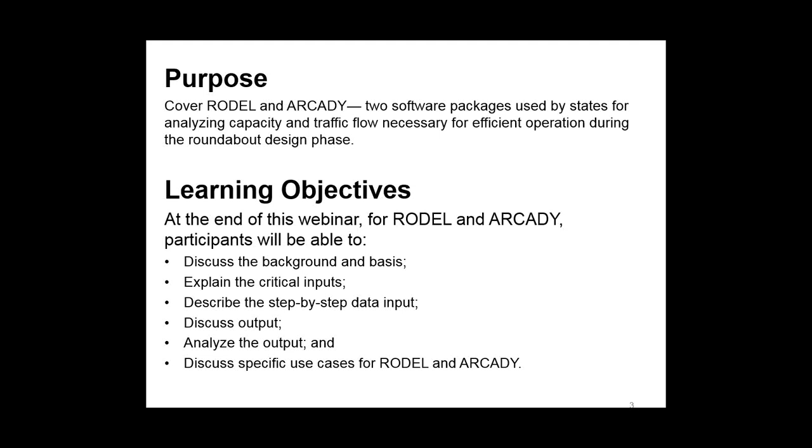TRB will provide 2 professional development hours to professional engineers that attend the entire webinar session. As far as today's learning objectives, at the end of the webinar for the systems Rodel and Arcady, participants will be able to discuss the background and basis of these software, explain the critical inputs, describe the step-by-step data input, discuss output, analyze output, and discuss specific use cases for Rodel and Arcady.

The outline of the presentation: just a quick introduction of some of the key features of Rodel. Then we'll get into the basis of Rodel, which covers in brief the research behind it, providing an understanding of what's under the hood and why that's important to understand. Then we'll talk about the transferability and validation of Rodel.

Are these UK capacity prediction equations transferable to the US and or other countries? We'll have a quick look at some of the comparisons of Rodel's capacity predictions to US field data and work that's been ongoing in that respect.

Then we'll get into the program and look at the inputs and the outputs, learn how to drive the program, review the key features of the user interface, and some of its other capabilities as well. Time permitting, we'll open it up into a demo of the program.

Okay, introduction. Rodel is a program that has an analysis process that facilitates the convergence of design solutions to meet operational objectives. It allows for the exploration and identification of viable alternatives for your given peak hour flows, your site constraints, and your project objectives.

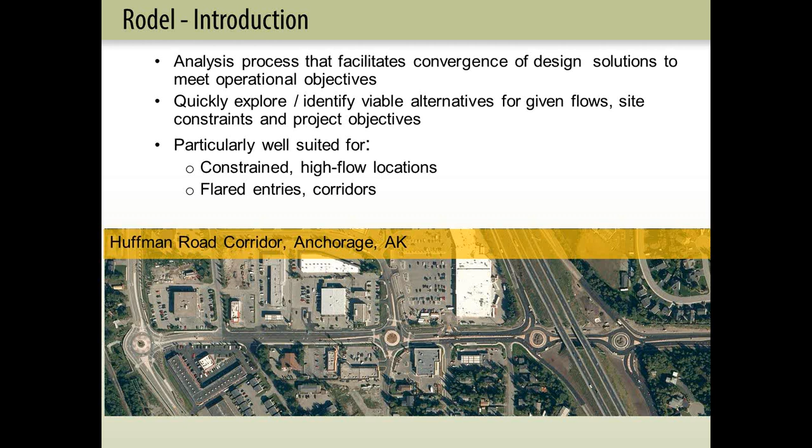It's particularly well suited for constrained high flow locations. It allows for the analysis of flared entries, corridors, and it works well for many other applications as well.

It was originally released in 1986 in the UK. It's been used by many agencies and consultancies across the US since about 1992. There was a major update in 2012, bringing the old DOS-based Rodel into the current Windows program.

It's had some major upgrades to include conformance with North American design and analysis practices, such as right-hand drive, English units, US peak hour factor. It includes now a print selection menu for documentation.

Importantly, it has maintained its interactive user interface, which is part and parcel to Rodel. It includes two capacity models. It includes the empirical model, which we will talk about a little bit later.

It has extended the application of the empirical model to include lane inputs to determine effective geometry, which we will also discuss in more detail. It fully integrates the 2010 HCM capacity model.

It provides identical results to HCS. It will include any future updates to that model as well. It now includes full right turn bypass modeling, full right turn lanes, or partial or yield right turn lanes. It has four different types of right turn modeling.

It now includes the crash prediction models, as well as economic analysis to include US and UK intersection and approach level crash prediction methodologies.

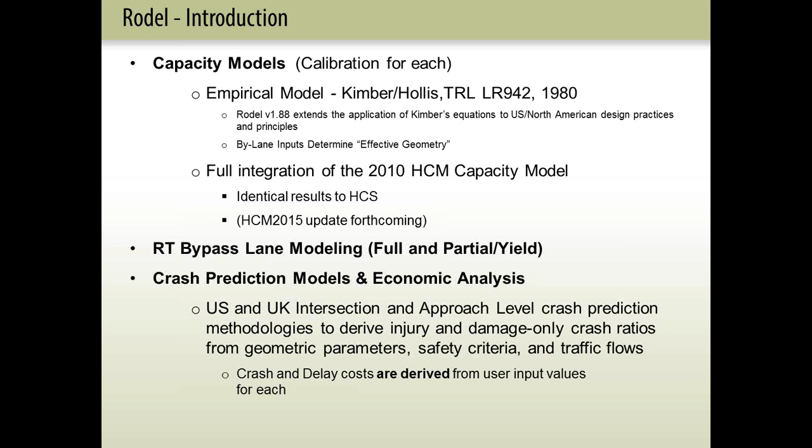So your crash and your delay costs are derived from user input values for each. You choose a specific crash model, you put in the costs per type of crash and or user cost with respect to delay, and it calculates that for you.

So Rodel's interface was developed to facilitate understanding of the analysis and to assist in the exploration of the design envelope to arrive at solutions. The inputs and outputs are explicit numerical values.

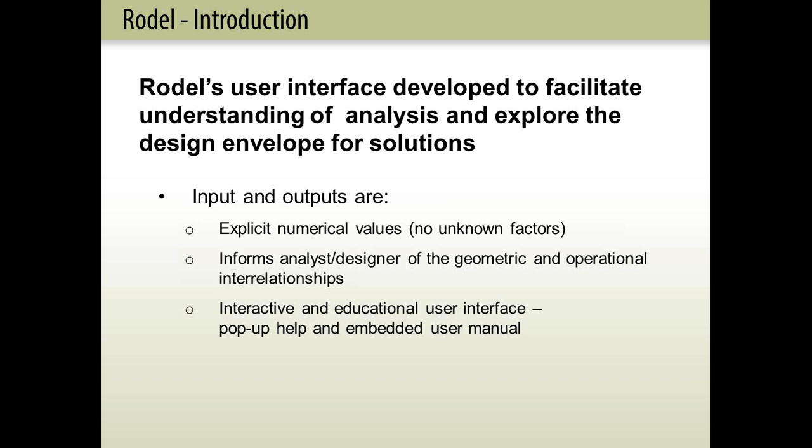There's no unknown factors. It's designed to inform the analyst or the designer of the geometric and operational relationships. It provides an interactive and educational user interface with its pop-up help as well as the embedded user manual.

The interface includes easy sensitivity testing to do what-if scenarios. You can increase or decrease your percentage of traffic for specific approaches to allow for testing of the robustness of a design. You can test with reduced capacity, perhaps due to contextual issues like on-street parking near the roundabout or other environmental constraints.

This can allow you to assess the potential for unacceptable queues or delays on specific legs, allow you to then evaluate and adjust geometry to bring those to acceptable levels. And this is completed with the user interface, which allows you to view the input and the output simultaneously.

It has two primary modes: a traffic planning mode, which allows the user to specify a target parameter such as delay or a queue or your V/C ratio, and then it will give you sets of geometric parameters to meet that targeted user specified parameter.

Which I used to use a lot when I was an early user of Rodel, and as you get more comfortable with it, I find myself using it less. However, occasionally it comes in very handy, and there's probably applications out there that others could benefit from in that respect.

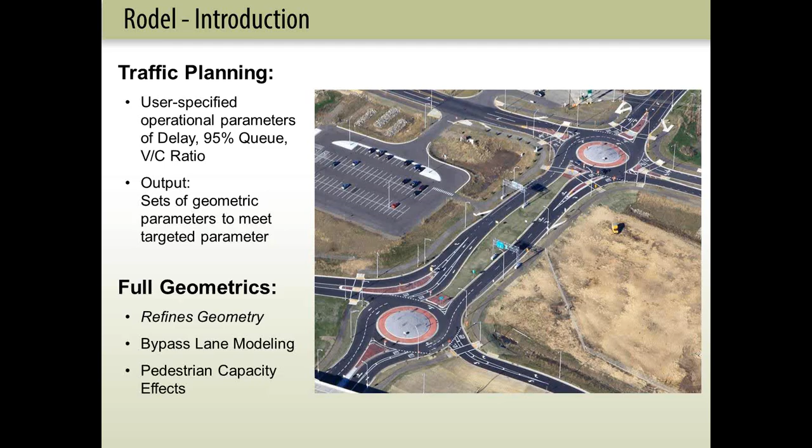It's fully HCM compliant. HCM and Rodel both utilize what's called time-dependent queuing theory, developed by a UK researcher long ago. Delay is derived from the queuing theory equations, so nothing in this respect is different from HCM to Rodel. However, Rodel incorporates high-definition queuing theory equations via time slices. These adjust for varying VC ratios, and the importance of this is that Rodel provides stability over the entire range of VC ratios, even ratios exceeding 1, which provides accurate operational predictions at higher VC ratio conditions. And again, in high flow constrained conditions, that's important. HCM implements a more simplified version of this, and its stability is stable up to about 0.9 VC ratio.

So taking a look at the basis of Rodel, we're going to spend about 10 slides on the empirical model.

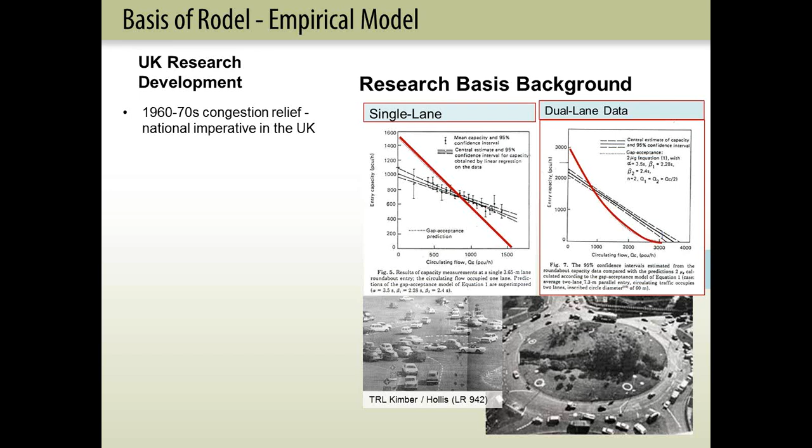In the 60s and 70s, congestion relief was a national imperative in the UK. They had significant growing automobile use and lots of congested roundabouts, and significant design and experimentation was conducted on these congested, saturated roundabouts. What they found, shown in the graphs on the right hand of your slide here, is that their existing analysis methodologies were not matching observed operations. So they desired an accurate analysis methodology anchored to the design geometrics directly, and they sought out and set in place a statistical regression analysis approach.

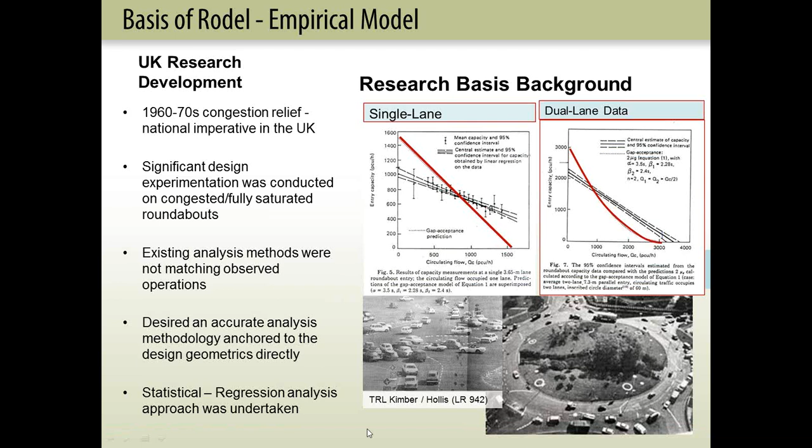And after about 10 years of effort, in 1980, they published Kimber's equations based on a significant amount of saturated capacity data over the full range of traffic volumes from low to high circulating flows. They rechecked those equations around the mid-90s and found them to be very stable with no changes required. The stability is attributed to the large statistical data collected over the full range of geometry and traffic flows.

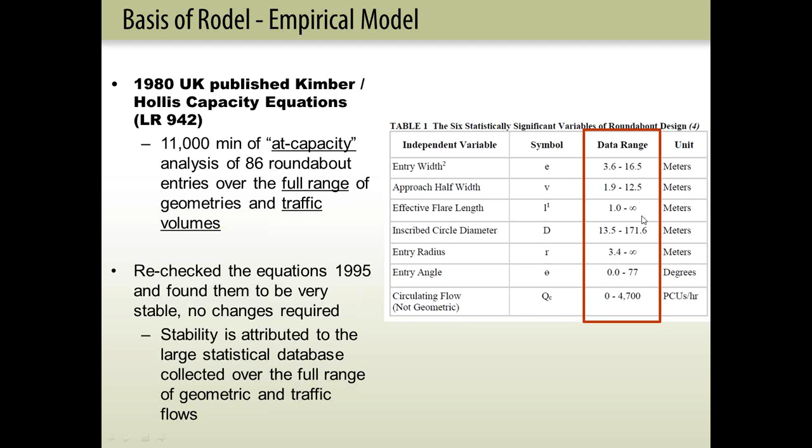You can see here on the right in the red box some of the data range for entry width, from 3.6 meters, a small single lane entry, to say a 4-lane entry. Same thing with the road connecting the roundabouts and the other geometric parameters as well.

In essence, what they did was identify the fact that there are a lot of capacity mechanisms going on at roundabouts. They were different than what occurs at signals or stop controlled intersections. Because of that, they went to the empirical approach and the regression approach. They wanted to capture the differing driver behavior described directly by the different geometrics of different sizes and shapes of roundabouts. This was a significant departure from their existing procedures.

So at the end, what they ended up with: they started with 35 geometric parameters, and they regressed these down to 16, then to 9, and finally to the 6 most significant.

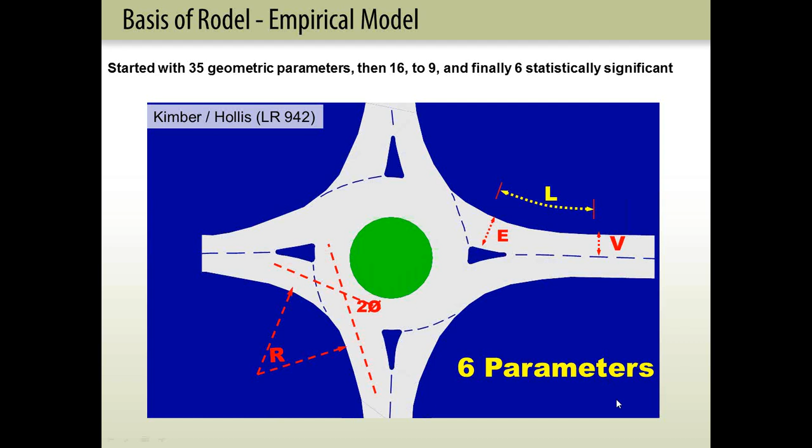Beginning with V, referred to as the approach width. These are the 6 parameters entered into Rodel: your entry width, E, and the distance over which you would flare. For example, if you had a multi-lane approach, a 2-lane entry fed by a single-lane approach, the distance over which you flare from that single-lane approach to the 2-lane entry. In addition, you enter the radius as well as the entry angle, referred to as phi. The actual angle there is 2 phi, so the entry into the program is half of that measured angle. It's a little confusing, but that's it, and then the diameter finally.

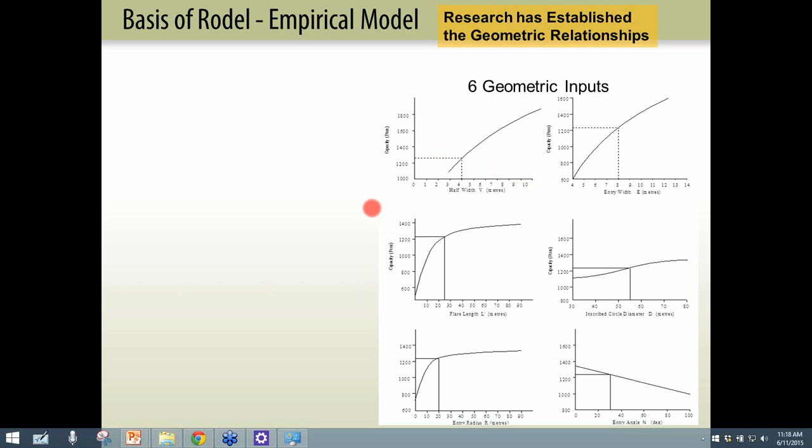We'll look at each of these geometric inputs a little bit more carefully, because each has varying effects. Let me just find the pointer here. Spotlight. All right, got the spotlight, but it doesn't look like I can advance the slides with it on. So anyway, I'll just use my cursor arrow.

The 3 major capacity variables are the entry width, the approach width, and the flare length. When they plot the entry width, E, on the x-axis compared to capacity on the y-axis, it goes up at a nearly 1-to-1 value, so E is very sensitive to capacity: more entry width, more capacity. V, similarly, goes up at nearly 1-to-1 and is also very sensitive to capacity. Flare length goes up very steeply versus capacity, but then it breaks, there's a breaking point at which it falls off. So adding more flare over a certain distance provides no value. It's important to understand that. Those are the 3 major variables that affect capacity.

Then the radius, the phi angle or entry angle, and the diameter are minor variables. Looking at these individually, the radius in the bottom left goes up very sharply and then breaks. So over that distance, there's no benefit, and understanding that is important in the design process. The phi angle also has a minor influence on capacity, in the sense that the steeper the angle, the more perpendicular the entry, the less capacity you get.

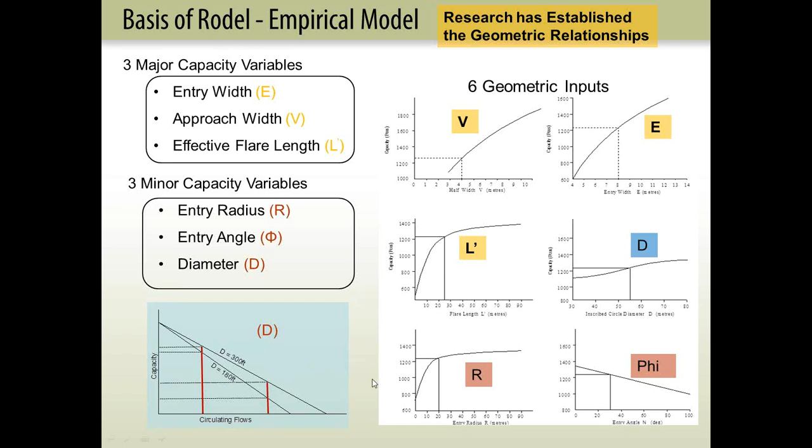By contrast, at high circulating flows, when you're challenged in a design, understanding this can be quite useful, because at higher circulating flows, that same increase in diameter can produce a doubling of capacity at the high circulating end.

So these are the three major variables used in Rodel: V, your approach roadway width; E, your entry width; and the distance over which you widen from V to E. Those are the essence of Kimber's equations. And again, there's the radius and the entry angle.

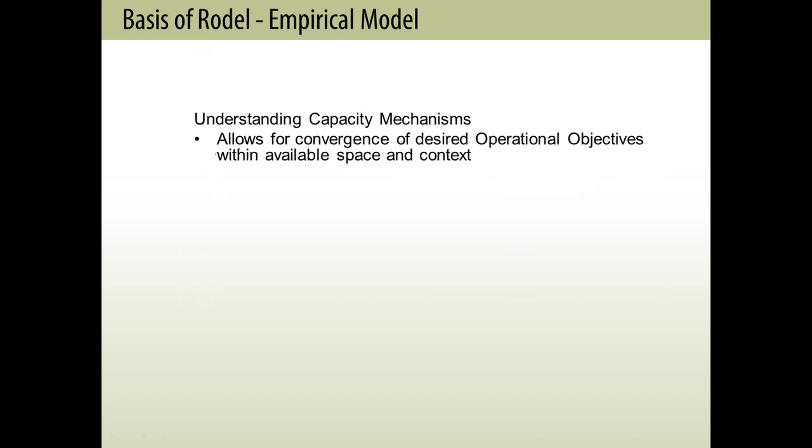Understanding these various capacity mechanisms allows for convergence of desired operational objectives within the available space and context. You're looking to avoid under-design with early congestion and poor public opinion, or over-design, which gives more capacity than necessary, more entry lanes, perhaps larger, faster, and less safe geometry. It could also affect feasibility, such as greater impacts, more right-of-way, and higher costs.

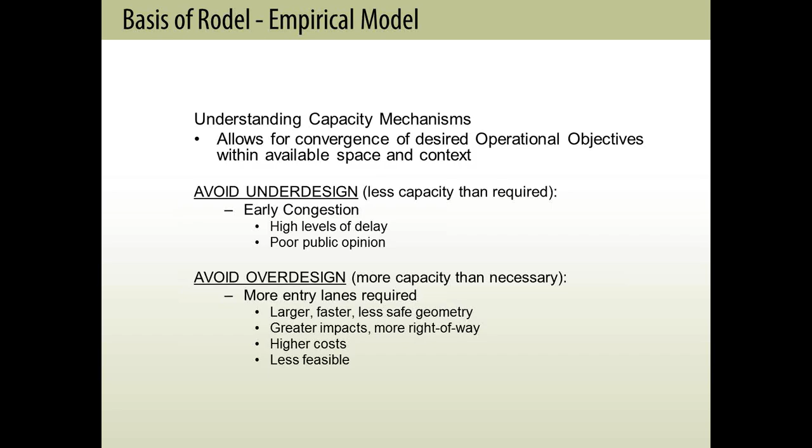So moving to the next section, titled U.S. Validation and Transferability for North American Practices.

Early on, I struggled with this part of the presentation, not knowing the familiarity with the history of these programs and the issues here within the U.S. But it's often been discussed and thought that UK drivers are more accustomed to roundabouts, since they have lots of roundabouts producing higher capacities, and it seems like a reasonable thing that would be true.

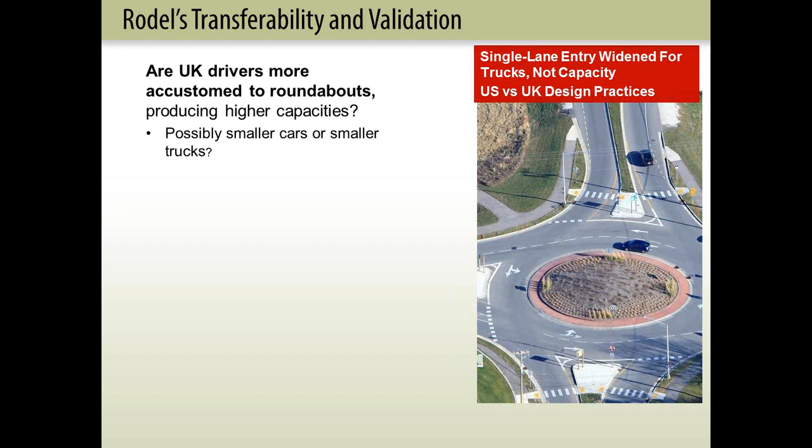Perhaps they have different types of cars or trucks that would affect this, and to some extent that may be slightly true. But what was reported early on is that U.S. researchers were confusing U.S. and U.K. design practices, specifically effective entry width versus actual entry width from a capacity perspective.

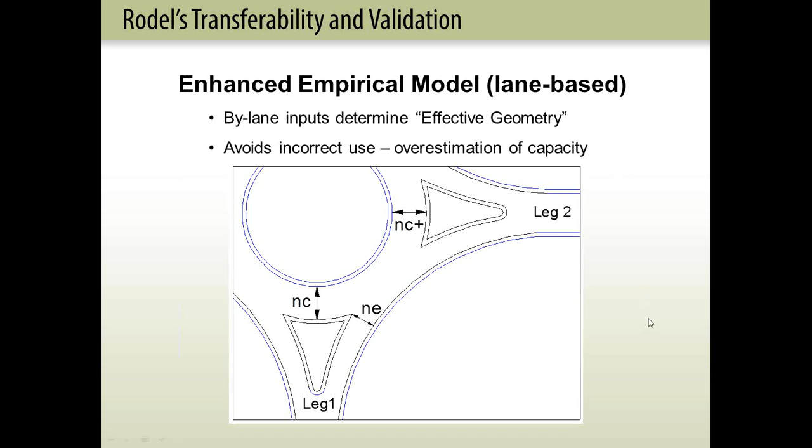The new Rodel avoids all this. It now has by-lane inputs, which determine your effective geometry, avoiding the incorrect use that could have occurred with the previous version. Interestingly, when you look back at Kimber's data collected in the UK on a small single lane entry roundabout, it was almost identical to our US data for small single lane roundabouts.

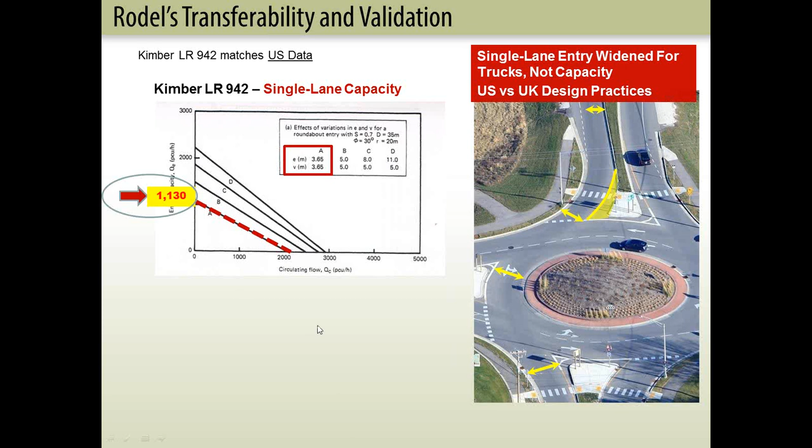So if you look here at a flared entry design, that's where you're getting about the 1,800 vehicles per hour intercept that had been incorrectly predicted for a single lane roundabout. What that's actually modeling is a true flared entry roundabout, shown here on the right.

And this is some FHWA data. There's a separate work effort ongoing, TOPR 34, which is going to be used to develop a new updated HCM model that may be out in 2015 or early 2016, is my understanding. But with that understanding, we've separately looked at their data to try to compare Rodel's predictions to this data.

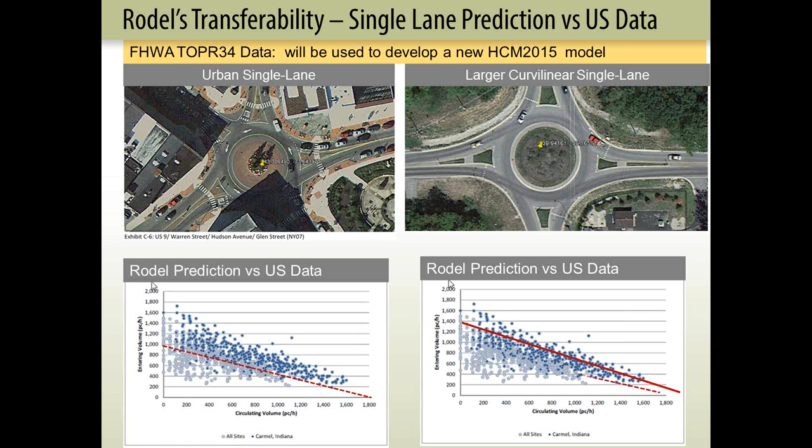On the left, you see what I'm calling an urban single lane roundabout. It has a smaller diameter, tighter entries, tighter radiuses, and it gives a capacity line. Those capacity data are the gray dots in the graph below. On the right-hand side is a larger curvilinear single lane roundabout, which gives a higher capacity. So Rodel is able to capture the various capacity mechanisms occurring even within just a single lane design, from a smaller urban compact to a larger, more curvilinear design. That's just overlaid with the original data there.

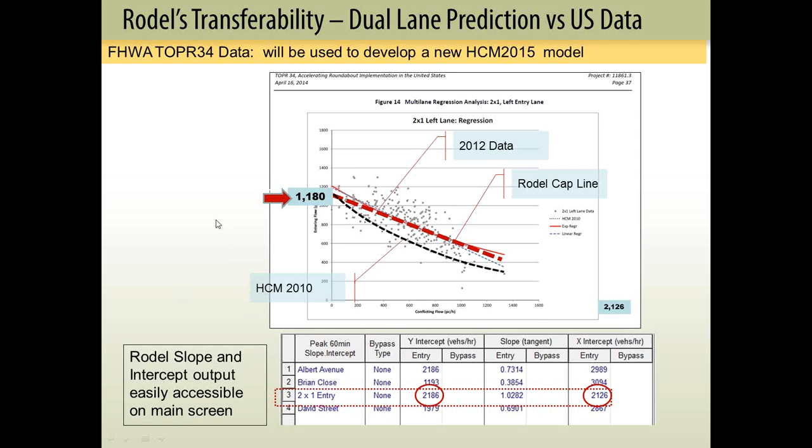And so Rodel allows you to easily look at the X and Y intercepts of the capacity prediction. You can easily compare how Rodel is predicting compared to the US data. This is for a two-lane entry roundabout, one lane of a two-lane entry roundabout, and Rodel is right there with the US data. That gives us a lot of confidence in its predictive capabilities.

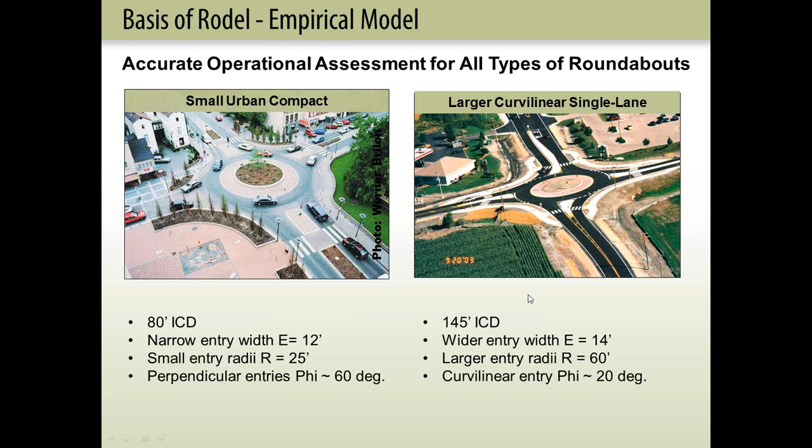So Rodel can be used for analyzing all types of roundabouts, from small urban compact designs with very perpendicular entries and small entry widths, accounting for the capacity effects of that shape, to larger curvilinear designs. Moving to more multi-lane applications, you can have a wide variation in types: single, multi-lanes, various right turn bypass lanes, hybrids, turbos. Rodel will capture the operations of these various roundabout types, giving you a high level of confidence in traffic operations predictions.

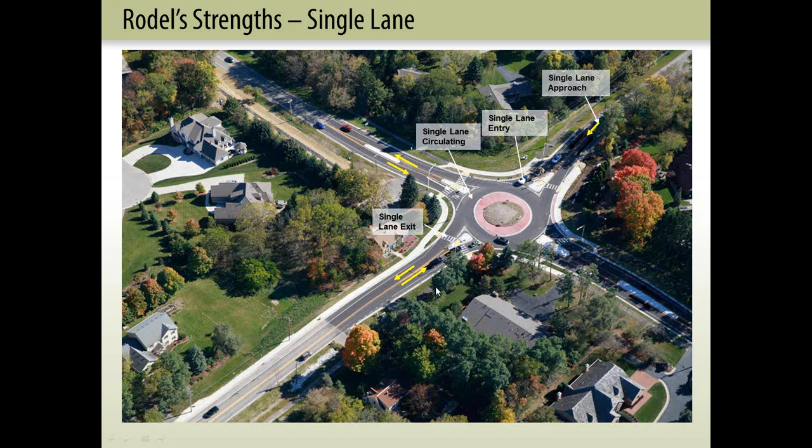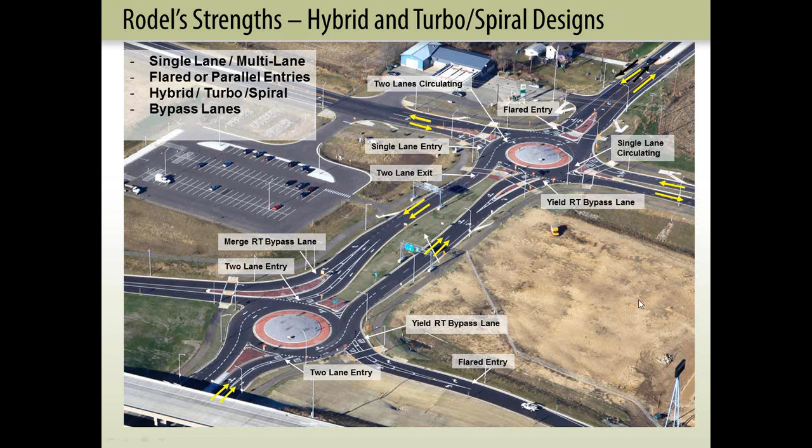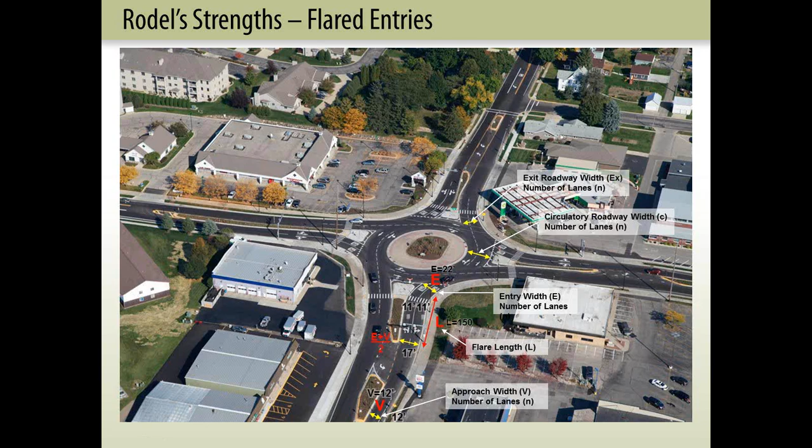This is a three-lane entry with a full right turn bypass lane. Rodel can model up to four lanes of entry, which is rare but occasionally occurs. Here's a flared approach: your approach roadway width V, your entry width E, your distance over which you're flaring. You're going to identify a 2-lane circulating and a 2-lane exit as well. If you don't identify these correctly, Rodel gives you error messages within its pop-ups, and doesn't allow you to make the mistakes that occasionally occurred with the previous DOS version.

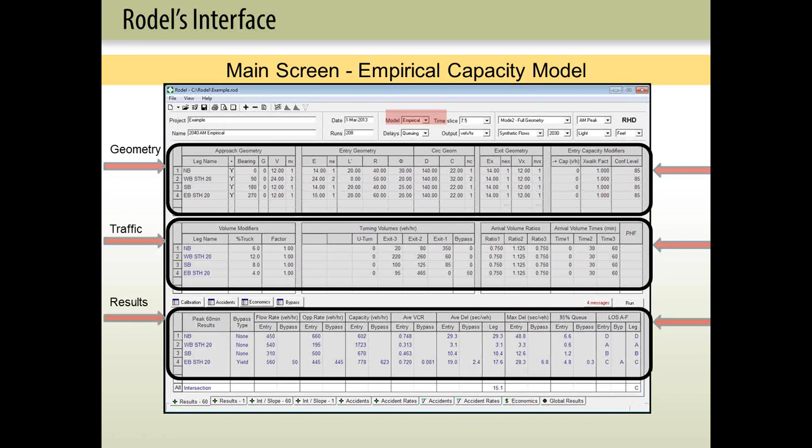So, a program over here—let's learn how to drive it a little bit. The user interface is a really important component. It looks pretty. Basically, we'll look at the empirical model: your first row is your geometric row, your second row is your traffic flow inputs, and your third row is the results, or your output. This is the user interface where you're able to put in the geometrics and see what's happening from an output perspective in this results row simultaneously. That allows you to test for the what-ifs and get a feel for what geometry can work for your situation.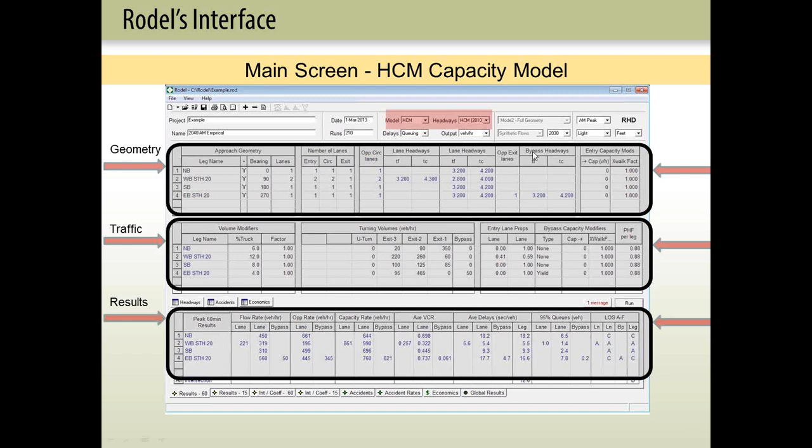You can toggle between the two models within the same project to compare and contrast how one is comparing to the other.

You have your project information up on top. It can allow your print menu, you can add or subtract legs, add notes, and view your exit flows. You can view the operations in various time slices, from a 15-minute time slice all the way down to a 1-minute time slice, to understand the rise in the flow of traffic through the hour.

This is where you choose the type of flow. You put in either a peak hour factor, choose your model, and choose queuing or control delay. Then you choose if you're going to use peak hour factor, which is most common in the US.

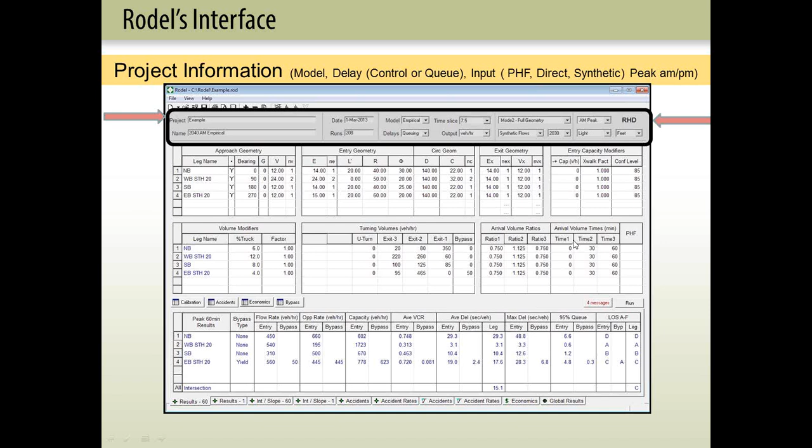It also maintains the UK direct and synthetic modes. The direct mode is an area that doesn't get much discussion, but we're starting to use it more with analyzing existing roundabouts, and it could be very useful for capacity research as well.

You also choose your peak here in the top row. Again, your geometric inputs.

Rodel now includes a geometry editor, so if you click on one of these three boxes that are highlighted in the cyan color, you get a geometry editor, so you can add your geometry and your lanes visually as opposed to numerically in the columns.

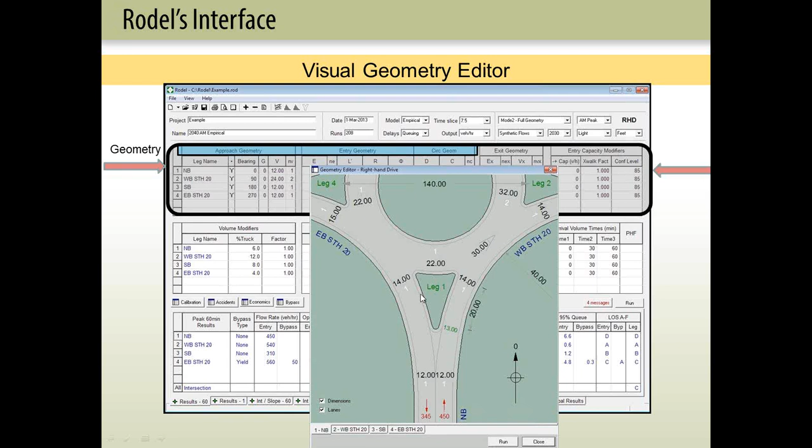Then you go to secondary inputs, which includes calibration for each model type, and your crash, economic, and bypass inputs. So we'll take a look at bypass calibration and the safety and economic analysis.

When you press on those buttons, you pull up your calibration for either model that you're working in, whether it's the empirical model or the HCM model, and you can calibrate for each. Again, each has pop-ups, user help pop-ups, to provide you with a quick summary of what each thing means, which becomes very useful through the course of understanding what you're doing.

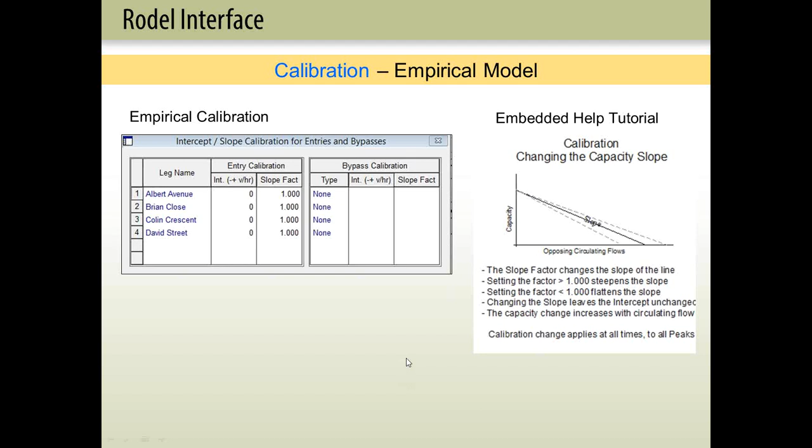You have the HCM calibration as well for your two. You can do calibrated values and save those calibrated values for use later.

For the accident model, you choose an accident model. There's the U.S. NCHRP 672 preferred vehicle model, which has been included with the UK pedestrian safety model. You can use the vehicle model by itself, or you can use the UK empirical model and look at crash analysis.

The output gives you just the crash numbers. It also gives you it in rates per million entering vehicles. It uses 24-hour ADT values - if you don't have those volumes, you put them in if you have them. If you don't, and just want a quick feel, it'll synthesize the ADTs using the rule of thumb, 10% of peak for ADTs. So it's a quick and easy way to get a feel for that.

On the bottom is some of the outputs that you see in the program: approach crashes, entering circulating crashes, exit crashes, all crashes, and PED crashes.

Under the economic evaluation box here is where you put in your costs. I've input some numbers here, $1 million for a fatal, 500,000, and so on and so forth. You can also put in a cost per hour for delay, and it calculates that for you.

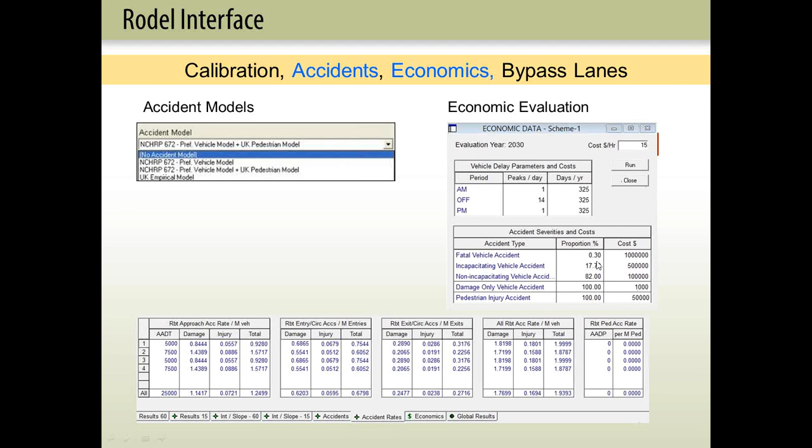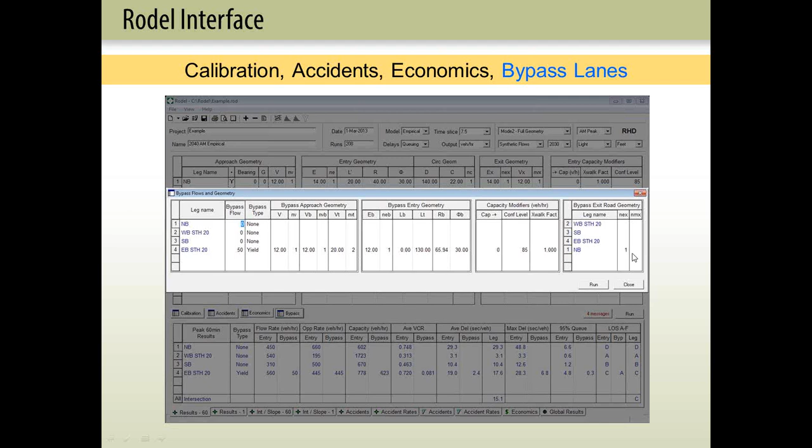Here's the bypass input menu for the type of bypass. You choose if you're using a yield or a full bypass, and then you have all the geometric inputs as well that you place into the program.

It also does bypass lane types: yield bypass, so a right turn lane that comes to a yield line, whether it's separated by just paint, a raised auxiliary island, or painted gore. It has 3 different types of yield lanes.

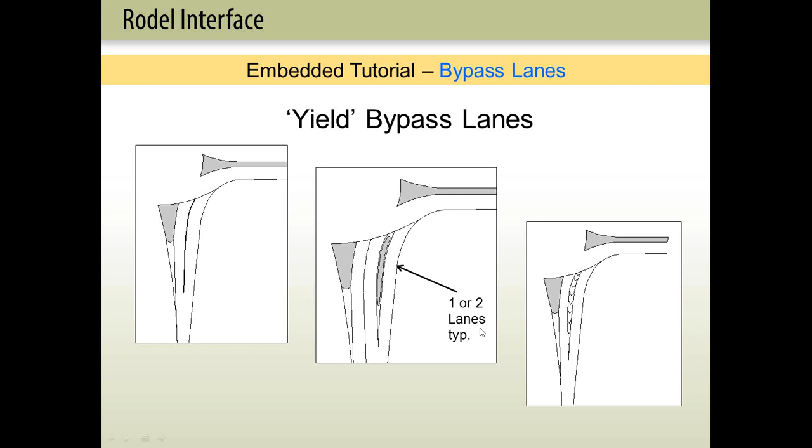It also can allow you to model dual right turn yield lanes - this says 1 or 2 lanes, that can be a dual right turn lane, which can come in handy in some situations.

Moving to the results part of the user interface, it gives you your flow rates for your entries and your bypass, or your opposing or circulating flow. It gives you your capacity, your V/C ratios, your average delay, your max delay, your 95th percentile queue, and your level of service based on unsignalized thresholds. You can also easily look at your intercepts from a capacity perspective, your y-intercept and x-intercept, and the slope of the line, which we looked at a little bit earlier.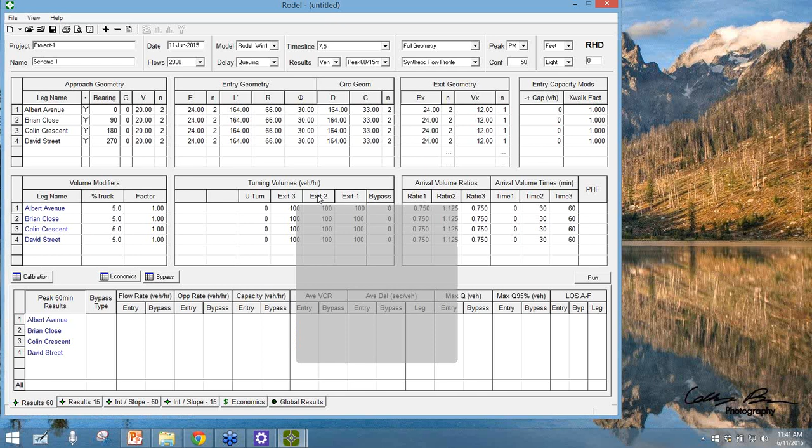This is where you put in your legs. I'll start with northbound, and then it goes counterclockwise, so this would be westbound, southbound, and eastbound.

You put in your bearing in terms of if it was not a standard cross 90-degree intersection. That is taken into account in the UK safety equation, so it's the only place that would be included.

This is where you put in your approach roadway width. So if you have a 24-foot two-lane road approach, it could be 20 to 24, typically 24. It could be a little wider, but often we use that.

This is where you would enter the number of lanes. So you identify one. If I have two in here, it'll give me some kind of a warning that something's not right, so I push it back. Here's your geometry inputs.

I was talking about if you were to specify different delays, you could put in different delays, put in some traffic, and try to get it to match. I'm going to choose I'm in synthetic, which is the UK methodology, a pretty refined way of modeling the rise and fall of traffic over the hour.

If we put in a peak hour factor, more consistent with our US practices, and hit run within this planning level, I can go up to this icon, the view entry geometric options, which will give me different entry width and flare length options to achieve that targeted delay.

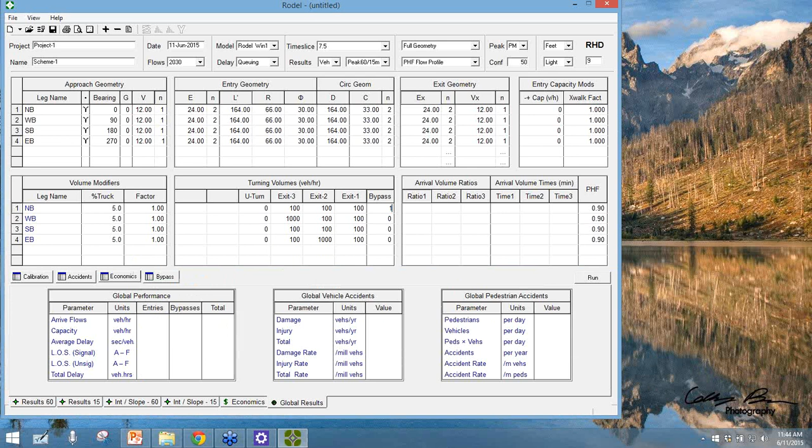Here's the bypass entry. If you were to look at entering bypass lanes, you'd choose the type of bypass you're using here, yield for example, and it'll tell you you've got 0 flows on that leg. So there's a lot of checks and balances within this.

Here's your economics input. We talked about adding your user costs in here for fatal and different types of injury crashes, as well as pedestrian crash costs, and your delay costs go up here, cost per hour, if you wanted to do some economic analysis.

Your calibration tab—we're in the empirical model, so this is the empirical way. If you click on the icon, the pop-up, it'll give you a description of how you could potentially adjust the slope and the y-intercept to more closely match observed data.

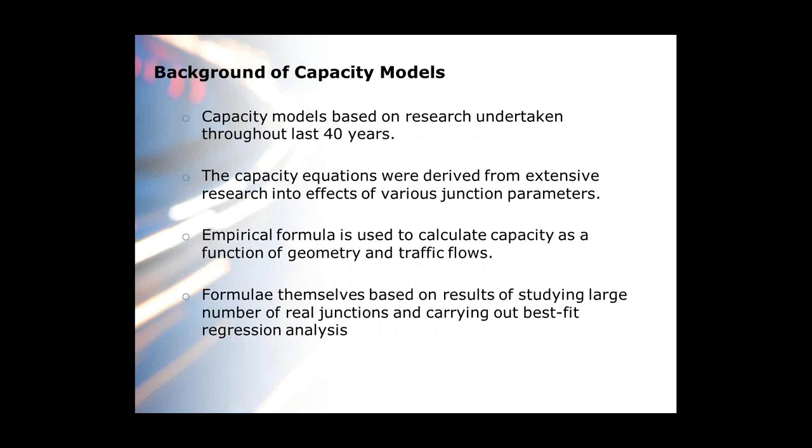We also reviewed those relationships in the 1990s to ensure the appropriateness of the model, and it was found to still be accurate. We've also managed a number of other capacity projects which looked at large and grade separated roundabouts, which have a slightly different capacity relationship, and we also looked at UK style mini roundabouts and developed a capacity relationship for that. We've just finished a research project where we revised the mini roundabout UK model, which was included in the latest release of the software.

So these are the capacity models currently accessed within the latest version of Arcady. Obviously you have the normal standard roundabout capacity model. Large and grade separated roundabouts have a slightly different capacity equation applied. There were 2 research projects undertaken on the larger scale roundabouts, and it was found that there was another geometric input and another flow input required to accurately model those types of roundabouts.

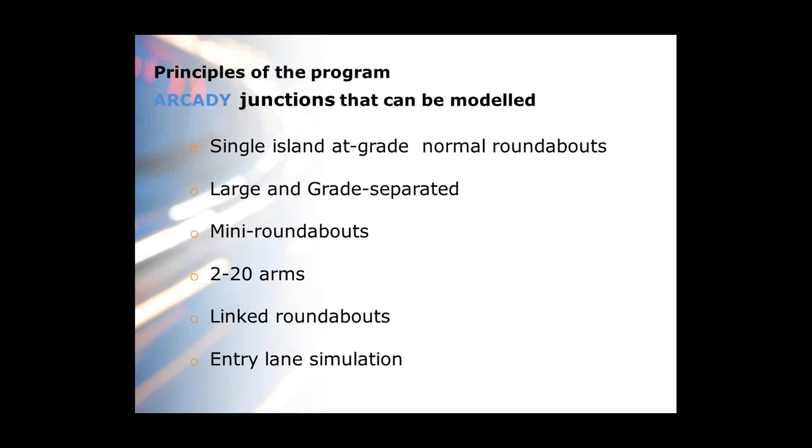These are the different types of roundabout that can be modelled within the software: single at-grade normal roundabouts, whether compact single-lane entries or wide 3-lane entries, with or without flare—it can all be modelled within the Arcady software. It can also do large and grade separated roundabouts, mini roundabouts, and you can have a roundabout with between 2 and 20 arms. You can link roundabouts or have a network of linked roundabouts in a system, and model each roundabout, any type, using the entry lane simulation mode.

A few quick slides based on the principles of the program. As I said earlier, the program uses an empirical formula to calculate the capacity of each roundabout, or each leg of a roundabout, as a function of the measured geometries and of the circulation flow passing through that arm. This is the standard formula which represents that calculation, where QE is the entry capacity, QC is the circulation flow, and F and S are the intercept and the slope that's been calculated. So basically they are constants determined by the geometric characteristics of the roundabout itself.

So the capacity formula used within the software is linear in nature. We consider it to have a slope and an intercept. The intercept is on the y-axis, and that is the maximum capacity that can travel through an individual leg based on your entered geometric parameters. As your circulation flow increases past that leg, your capacity will actually decrease. When we did the research for all 86 sites, originally all these graphs would have had similar vague plots, and that's how the linear regression model was developed over the whole range of all the sites we looked at.

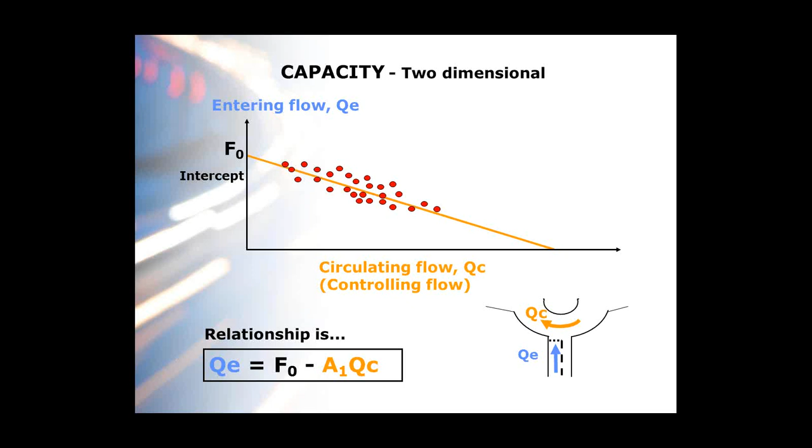Another basic component or principle of the program is the relationship between the circulatory flow and the entry capacity, and the interaction between the arms. The circulatory flow across any entry is derived from the entry flow and the turning proportions from the other arms, the other legs of the roundabout you're investigating. So the circulation flow is derived, and then during an Arcady run, an iterative process is used to calculate the final entry, circulatory, and exit flows based on your demand and inter-turning proportions.

Looking at some of the critical inputs used within the Arcady software now. As we said earlier, Arcady predicts capacity as a function of flow and geometries. To do a basic Arcady roundabout model, your basic entry requirements would be measuring and entering your 6 geometric parameters, which we'll discuss a little later. You need to enter the demand for each leg, the turning proportions for each leg, and if you have them, the heavy vehicle mix as well. That's the basic data entry that's required.

Obviously, there's a number of more advanced features you can utilize within the software. On completion of doing your measurements, whether that's by hand or by CAD, it should hopefully just take between 10 and 15 minutes to set up a basic Arcady file.

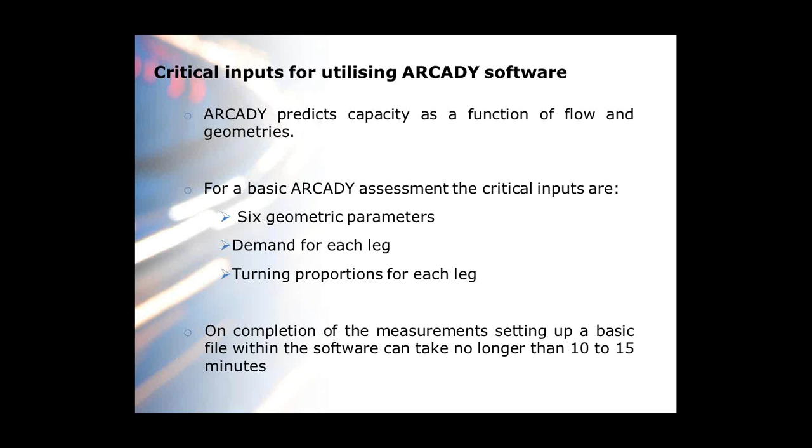One of the critical inputs you need to input into the Arcady software is vehicle demand. One of the main causes of error some people make when entering demand is they enter their turning proportions rather than their demand. Demand is what vehicle is demanding at each leg within a certain time period, whether that's at the front or the back of any queue. So if there's any queuing within a given time segment, those vehicles need to be counted as demand, as opposed to carrying it over to the next time segment. Any demand should be counted at the back, or upstream, of any queue.

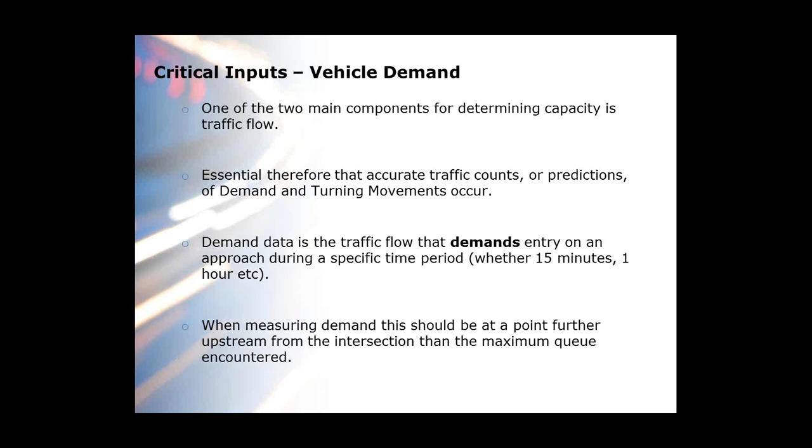Sometimes you may want to use the 4-hour profile type. This is where, if you have a prolonged peak period over a number of hours, you can enter 4 consecutive hourly counts, and it will then derive a symmetrical curve based on each individual hour count. The 1-hour profile is probably the most commonly used traffic profile type in the UK.

It's where you enter 1 hour's value, 1 hour's worth of traffic flow into the software, and then from that it will derive a symmetrical peak around the central period, and obviously your queues and flows follow a normal peak through that. Your queues and delays will generally rise and fall in line with that assumed peak profile.

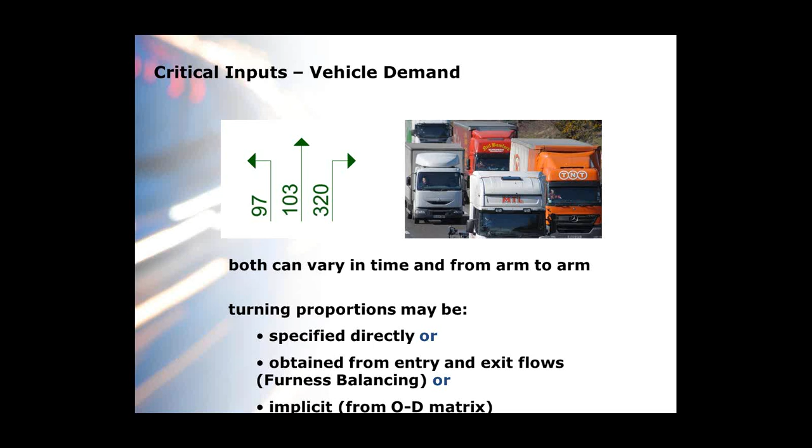That is basically taken perpendicular to the curb from where your yield line joins the island or road marking. When doing this, it's always imperative to understand that we need to measure usable road width. So, as Mark was saying earlier, if there is any hatching or you have a hard shoulder on the inside or in the median, then that's removed from any measurements that you take, because in those situations you would be likely to overestimate capacity.

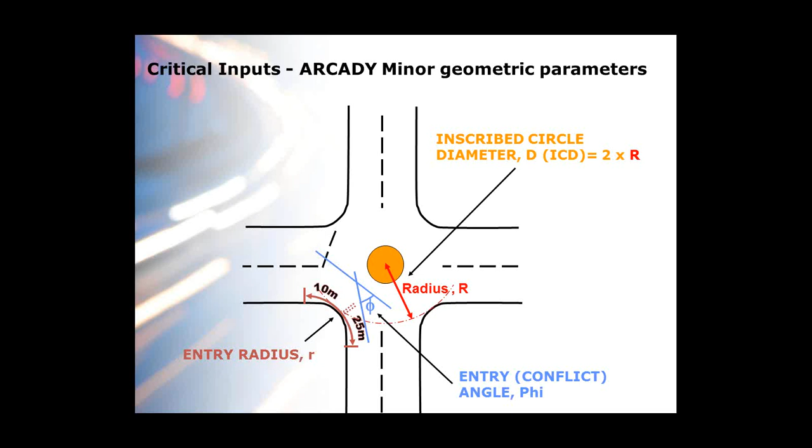So those are the main critical inputs into developing an ARCADY roundabout model - accurate demand, accurate turn proportions, and measuring your six geometric parameters. That's the six or seven basic elements you need to set up and run a basic ARCADY file.

I'm just going to go through a step-by-step guide for data input and how you go about entering all this data into the software.

When you first open up the software, you'll be given a startup file or startup window. This allows you to choose which type of junction you want to do, how many arms or legs are present if it's a roundabout, what roundabout capacity model you want to use, and how many demand sets - whether you want to do just a single one or an AM and a PM. Just by using this setup window, it will set up some of the basic information to save you a little bit of time as you get into developing the rest of the model.

Once you've selected your junction type and number of arms, the screen will open up starting with just the data outline. Data in ARCADY junctions is organised in a hierarchy - all of the data input and virtually all the outputs can be accessed via the tree view data outline. It's just a case of expanding these plus points, and it will allow you to find all the geometric data inputs needed to actually build the model.

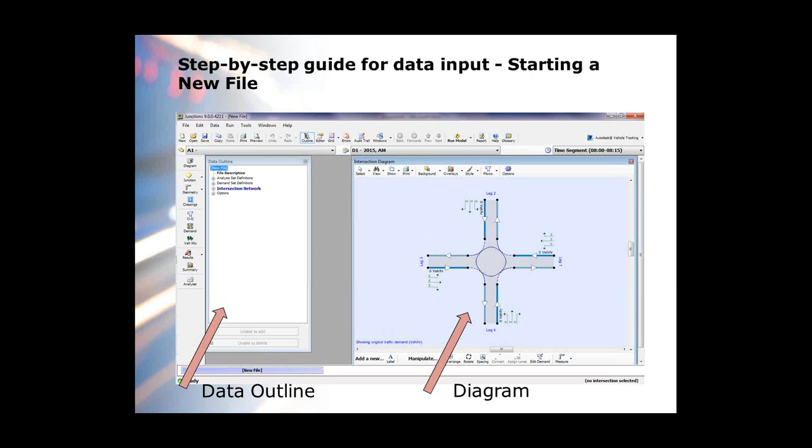So basically there is a step-by-step guide that you can follow to set up a basic file. It's generally what we call FAD icons, so file description, analysis sets, demand sets, and then follow those vertical icons down.

So the file description is just basically where you enter your basic job details, so job title, location, relevant site numbers, who the client is, your basic data entry for each individual project.

The next step, working down your data outline, would be to set up your analysis sets. The way analysis sets work is that it allows you to set up a number of different geometries or properties of a junction and then do direct comparison within the same file.

So instead of setting up a second file with a different set of geometries for the same junction, you can set up maybe a baseline existing layout, and then set up a second analysis set, which will allow you to build a second set of geometries, or maybe just change the geometries of one arm or leg, and then run that and do a direct comparison within the file. So it saves you a little bit of time instead of setting up different files or different sets of the same junction within the same file.

Your next step then is to basically set up your demand sets. The demand sets are how you enter your demand data into the software. In this case, it's just a case of entering your traffic profile type, so whether it's the one hour, the direct, your AM or PM.

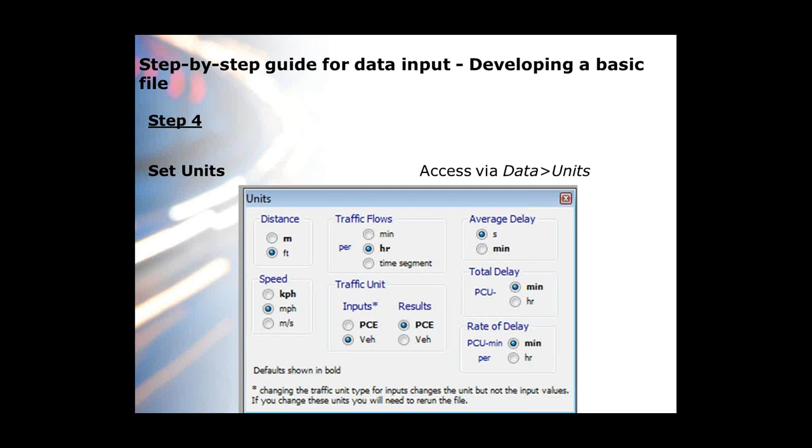So once you've set up all of your functions, your analysis sets and demand sets, it's then a case of following that vertical toolbar down. So you open your intersection window, make sure...

Set up, make sure you have the correct intersection type selected. It allows you to have the order of the legs. If you have one or two junctions within the file, you can select copy flows, and basically if you have a roundabout and a two-way stop within the same file, you can copy flows from one junction to the next, and then do your direct comparison.

Your next icon then down would be your geometries icon, and this is where you can enter your relevant geometric parameters which you've already measured.

A lot of these data items or data editors are compatible with Excel formats, so if you have your demand or some of your geometries already set up in an Excel spreadsheet, it's just a case of copying and pasting some of this functionality across, to ease the time you need to develop and build your files.

So once you've entered your relevant geometries, you can then add a crossing if you need to. So you have a choice of unsignalized or signalized crossings.

Once you've developed your geometries, it's then the case of entering your relevant traffic demand, turning proportions, and vehicle mix. These are your next icons down.

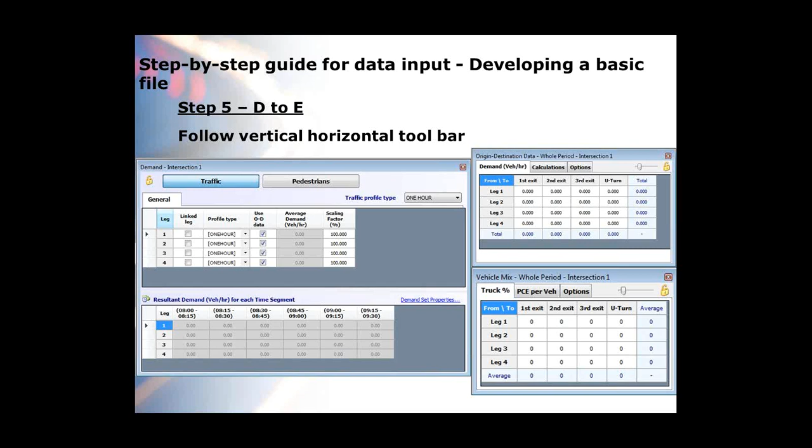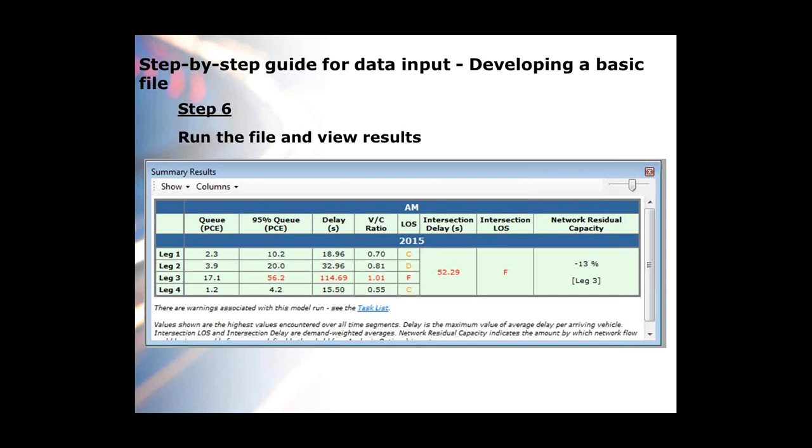Once you've entered your geometries, heavy vehicles, and flows, it's just a case of running the file. As soon as you've run the file, a summary window will appear, allowing you to see, in many cases, the worst results for each leg in turn. Some of these results may be from different time segments within the model, depending on which traffic profile type you're using, but this gives you the worst results for each leg in turn, and a very quick and easy idea of what legs are performing worse, and where you need to try and improve the roundabout.

We're just going to have a quick few slides looking at the output of the models and the accuracy and reliability of the results.

Like any data input, if the data is entered at its coarsest level, using all the default options available, then the results you get back are going to be at the coarsest level as well. So we always say that default values within the software should only be used, or used with great care, and only when it's impractical to obtain better data.

So where possible, the accuracy of capacity and delay calculations for an existing intersection may be improved by the use of local traffic observations.

There is functionality within the software called the analyzer screen, which allows you to do quick analysis of the results, to check the robustness of a particular design. Slight variations in geometries can be tested and analysed within the software.

The use of the program should be limited to situations in which the values of the geometric parameters lie within the ranges over which they were developed and observed within the initial research. Once you start entering values outside the bounds of that original research, you will generally get a warning within the software saying your flare length exceeds a certain distance, and you need to treat the results with care.

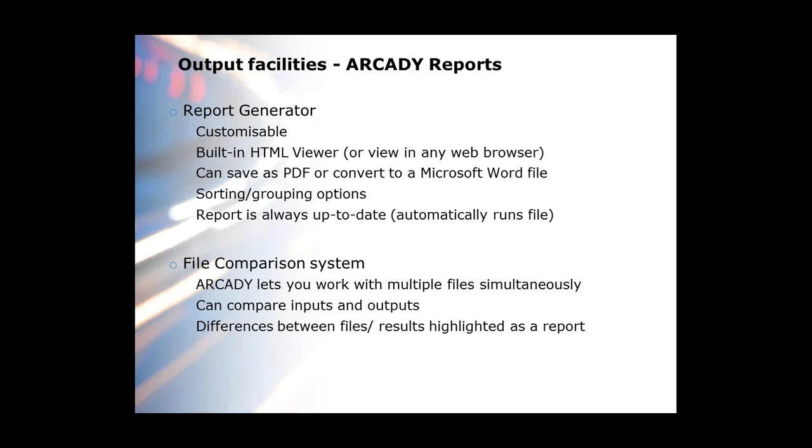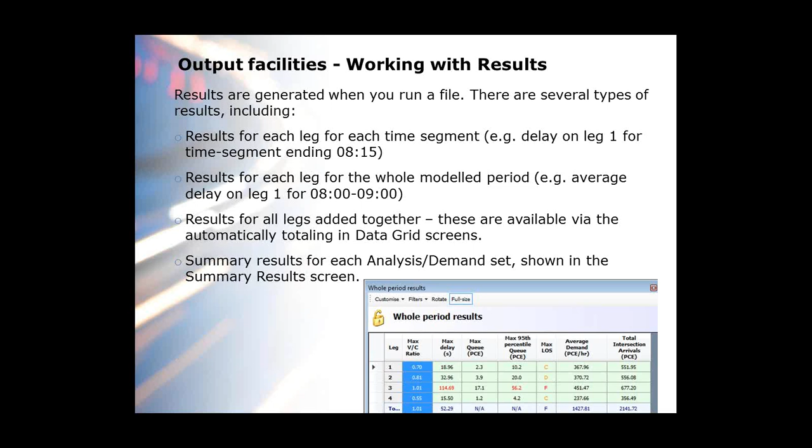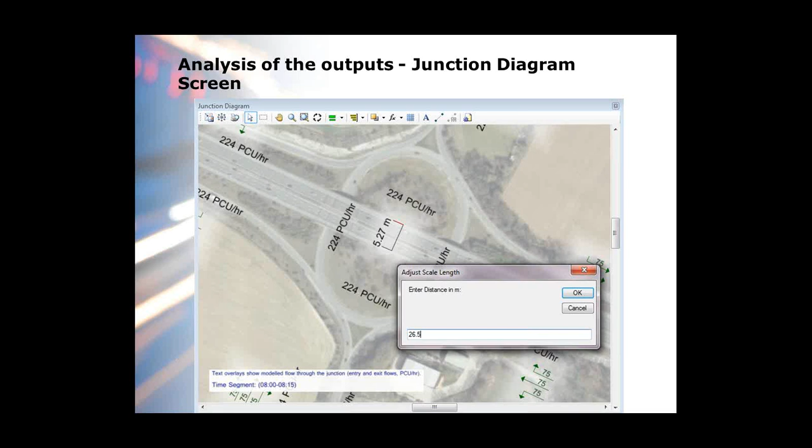The junction diagram also has the ability to import background aerial images, JPEGs, or roundabout designs. You can set up a scale within the system—if you know a defined measurement, you can set that scale, and then use that image to show, in this case, queue lengths. These queue lengths have been scaled to a set distance: the red is where the queue extends to, the green is where it's coming down from.

You could potentially use your junction diagram as a way of visually displaying the results available to you. This can be copied and pasted from the software into Word or onto demonstration boards—a very quick and visual way of demonstrating to people the predicted queue length, whether that's your predicted maximum queue or your predicted 95th percentile queue. It's a very quick and easy way of displaying that information to other users.

We also have what we call the analyzer function. This is a way of showing a number of graphs to undertake analysis within the software itself. For example, it can show a graph for all your legs—if I change my network flow from 85 to 115%, taking 15% of flow off or through the roundabout, this is a very quick way of showing which arm is likely to fail first. This is against RFC, but you could do the same with capacity.

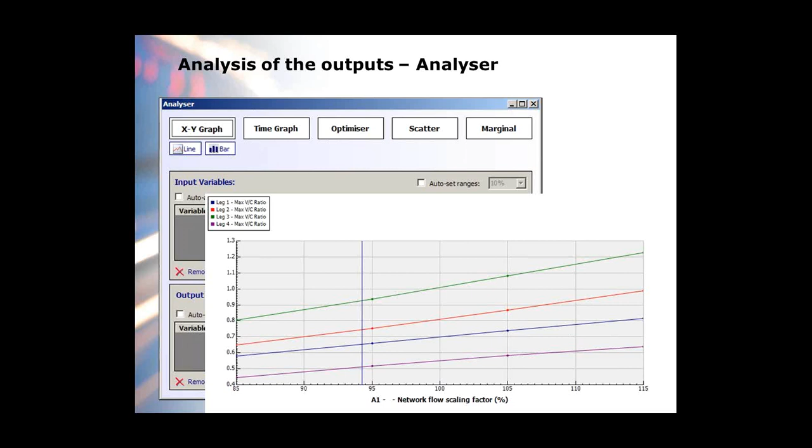One of the outputs from the analyzer mode is the optimizer screen. This allows you to attempt to find values of selected input variables that cause the values of selected output variables to meet user-defined targets. For example, you can say you want your RFC on all arms to be less than 0.85. You then enter which geometries you want to change and a range of values they can use, and it will try to optimize those geometric parameters to achieve your identified output.

This is a way of potentially using the software to help in the design process. Once you've determined which geometric parameters you need to change and by how much, you can then choose to store that within the software, so it becomes part of your new design for that roundabout.

With the calibration, there's never been an attempt in the UK to drive a national or regional correction. It's always been site-specific. There is the application of intercept corrections, which is an adjustment made based on observed capacity. This alters the position of your maximum capacity intercept, which will add or take away capacity from each leg in question. Once your capacity is correct, there's a very good chance that your predicted queues and delays are going to be representative as well.

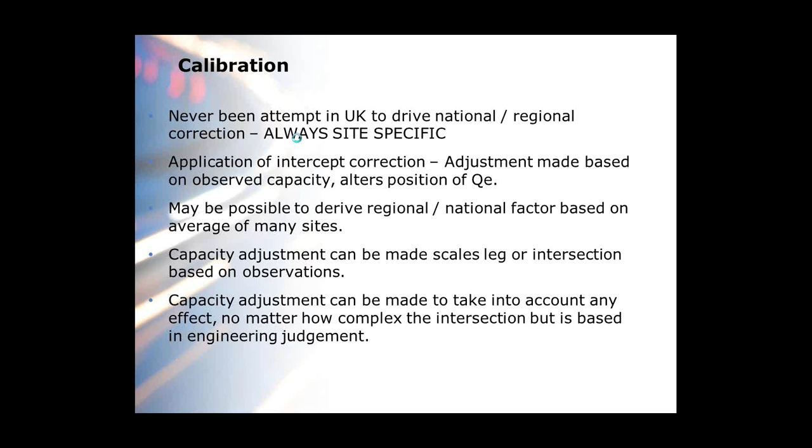One of the new features put into junctions was the entry lane simulation mode. At its core, Arcady uses the empirical models that relate entry flow of a roundabout to the circulation flow past an arm. One of the most important factors is entry width, and it was found that capacity increases continuously as entry width increases. This was found to be a better indicator overall than the discrete number of lanes at the entry. There is an assumption that the entry width is available to all vehicles for most of the time.

If there's a situation with unbalanced flows, or a small flare lane becoming blocked, the core Arcady model may underestimate or overestimate capacity, and results may be better or worse than expected. So we developed an entry lane simulation mode to model these on a lane-by-lane basis, providing users a way to model each roundabout design lane-by-lane as opposed to full entry width. This is one of the new features.

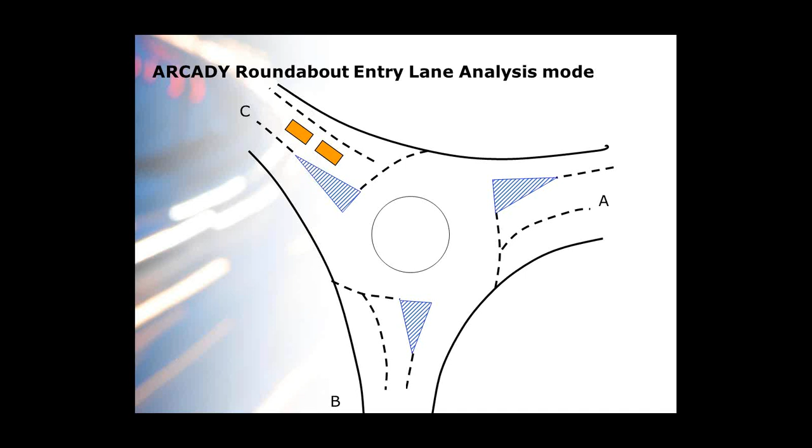This can even be used if you want to change lane assignment. It's relatively simple: once you've set up your core Arcady features and geometries, it's relatively simple to set up the lane simulation mode, and then you can do a comparison between the core and the lane simulation mode.

This is some of the outputs of the simulation mode. It will model each vehicle individually as it passes through, showing those queuing on each leg and turn, and it will look at percentile queues, providing shaded percentile queues showing which lanes have the most usage and which are suffering from entry starvation.

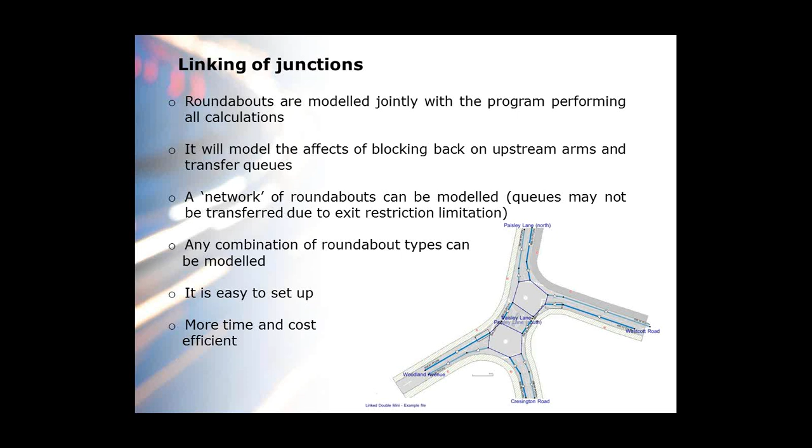It's also possible to link junctions together, so any types of roundabout can be linked together. You can have systems of 3 or 4 in a row, and it will model the interaction between them. Any blocking back that occurs will be transferred to the upstream roundabout, and queues and delays will be passed between roundabout to roundabout.

This is hopefully the final slide, covering some of the other features within the software. It's really easy to set up bypass and filter lanes. If you have a short flare on an exit, you can set up an exit restriction, or where it merges from 2 to 1 on an exit, you can apply an exit restriction.

It has the ability to apply national or regional calibration values if they're available, and the ability to personalize window layouts to suit user needs. You can store different window layouts or features within the system, save that to file, and every time you want to set up a new file, those windows are always there for you to access.

There is now an audit trail which tracks every single change made to the model as you go through, so you can go back and check. Also, you can copy and paste, or even read demand data from Excel now, so there's a link between the two systems. We also have a link to Autodesk junctions, which as you build a roundabout in CAD, automatically links to junctions or Arcady and updates the results as well.

We also have the ability to model the geometric delay, taking into account the fact that if you're introducing a network of roundabouts onto a corridor, it will predict the geometric delay of each roundabout, so you can see how much delay you're introducing to that corridor just by the roundabout being there as a feature. And then you also have the ability to assess safety, though it's only based on UK research at the moment—we're looking to address that and expand the safety methodology to cover alternative states and methodologies.